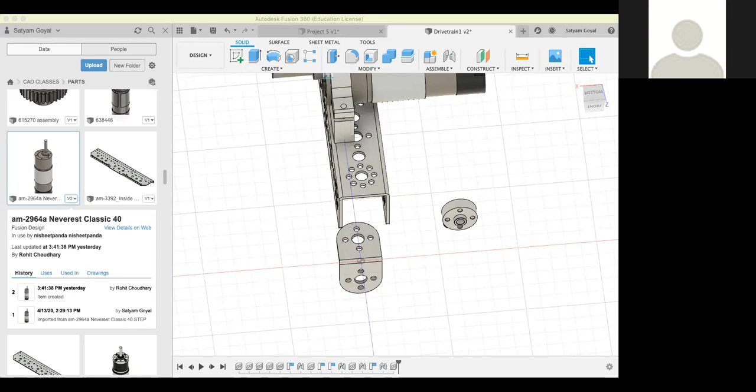Okay, so this is kind of like part two of day four. For people who just came, we were working on projection. We had a bit of trouble with it, but Rohit and I got it. I think we'll work on projection a little bit after we finish this project since you guys already got this started.

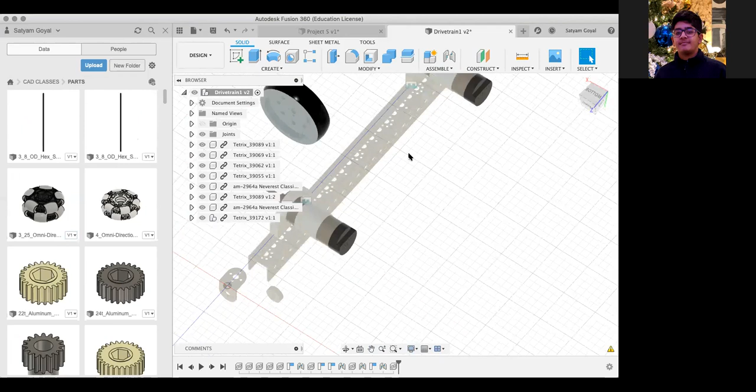So essentially what we've been working on is creating this mini drivetrain. Inside of that, we have this metal bar. I think the name of it is, let me check, Tetrix 39069. You guys can see it here.

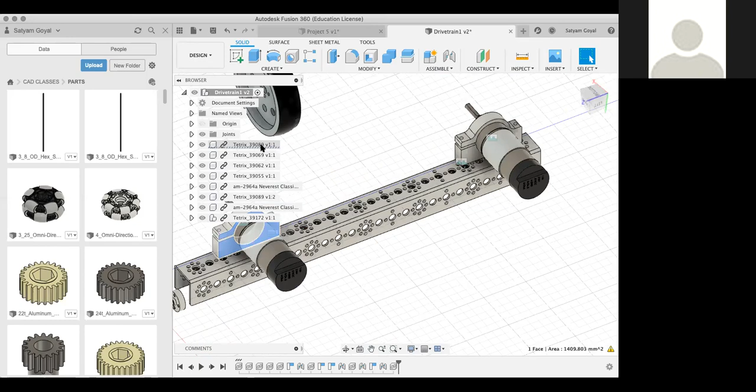We got this beam, and we were able to join two of these motor hubs on top. These motor hubs are 39089. So we joined these two motor hubs on top, and we were also able to join motors onto it, like this, right?

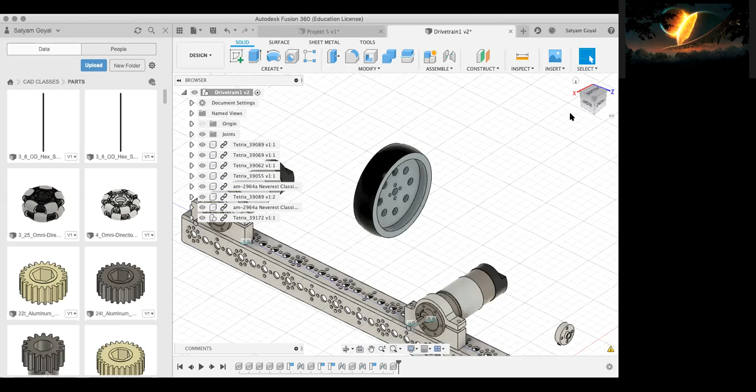How many of you are not at this step yet? Okay, Ritwik, Arush, and Nishi, you guys got it? Wait, are we supposed to do two motors? Because I only did one motor. Yeah, go ahead and just do two.

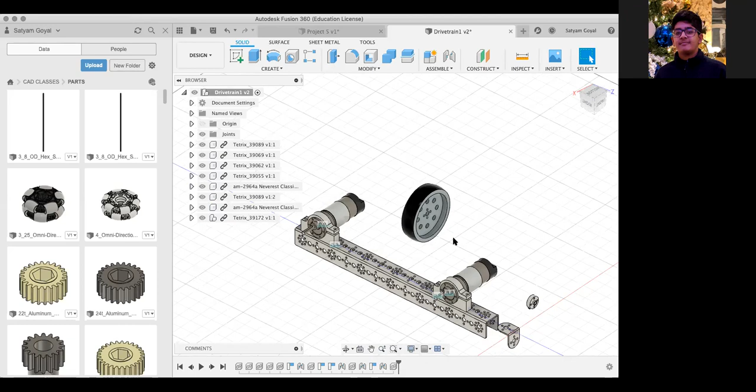On my screen, it's not showing me the orbit and pan options at the bottom. This stuff? Yeah. Okay, one second, let me find it. Let me try and help you. Just continue with what Satyam is saying. I'll get back to you on that. Can you still orbit using this, the square on top? Yeah, I can still orbit using that. Okay.

Are you using a mouse? Yeah. Okay, so if you press the scroll wheel, it'll allow you to pan. That's a cool trick. That works for everybody using a scroll wheel or a mouse.

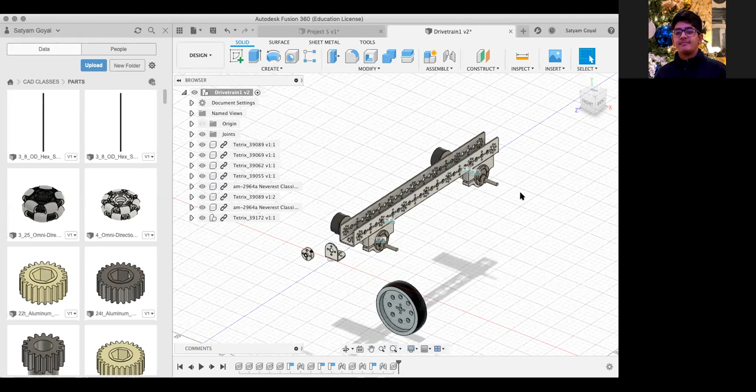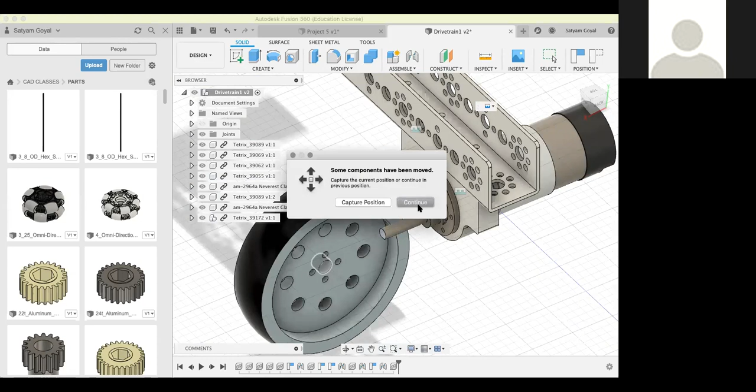So I'm going to wait for you guys to do that. This is where it gets a bit complicated. As you guys can see here, let's see if I were to join these. The obvious move would be, since this is the axle for the wheel, you join the wheel onto this. So if I do that, and then do this, see the issue is that it doesn't exactly fit properly. You see how there's that gap around there?

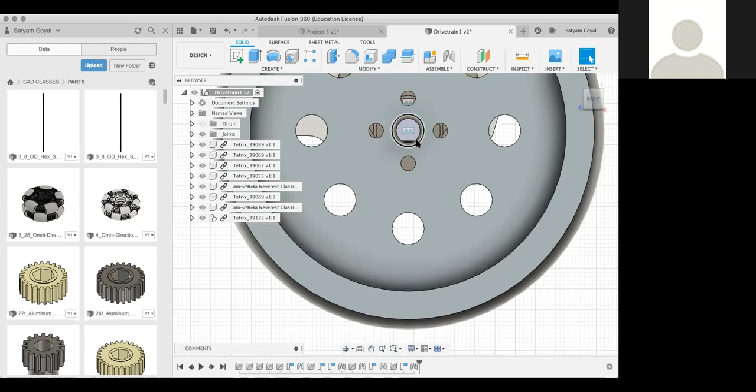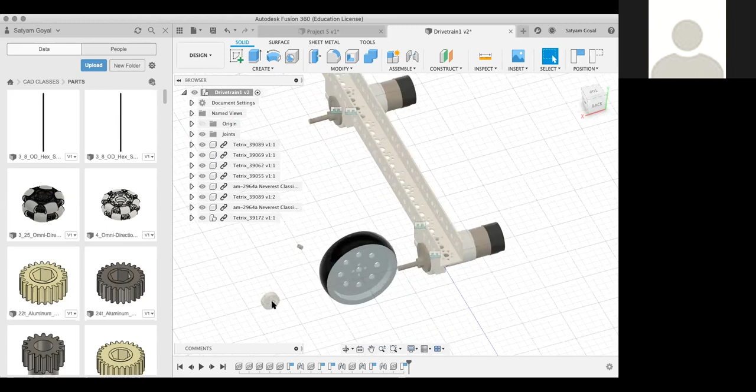Yes. So FTC has essentially created these kind of adapter pieces. I'm going to delete this joint. That is this part right here. It's called Tetrix 39172. Essentially, this small adapter allows you to put screws in through the motor here, and then allows the axle to fit onto this. So this might take a while to memorize once you get into FTC CADing.

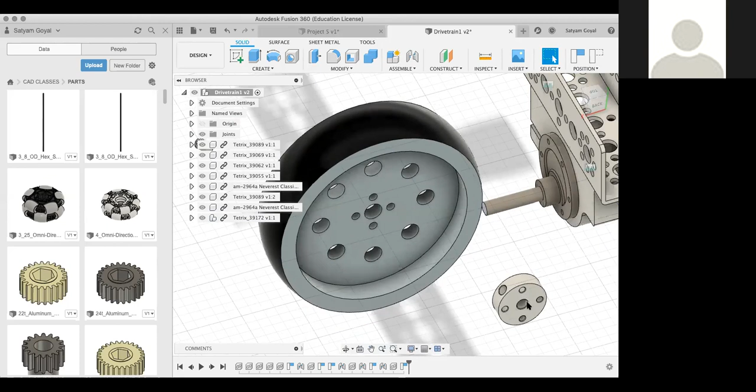Actually, I think I grabbed an axle hub instead of a motor hub.

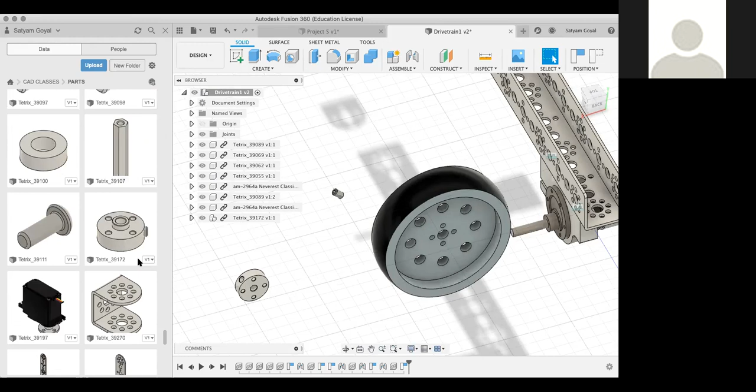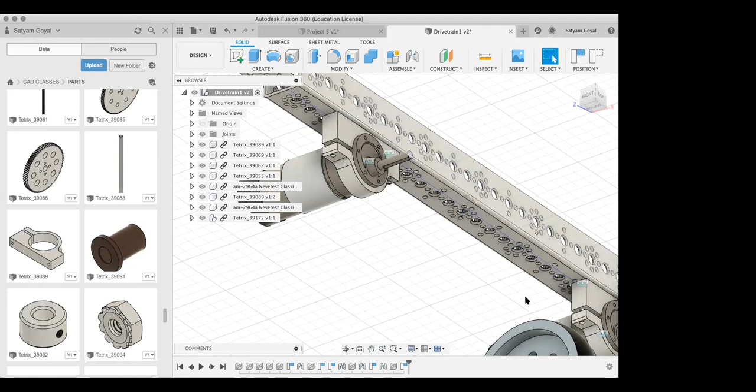I've been trying to fit the second motor into the motor hub, but it keeps fitting the wrong way. Remember, there's always that flip function you can use. So if you can see, when you do a joint, there's a small button at the bottom that says flip. If you press flip, it'll bring it to the right side.

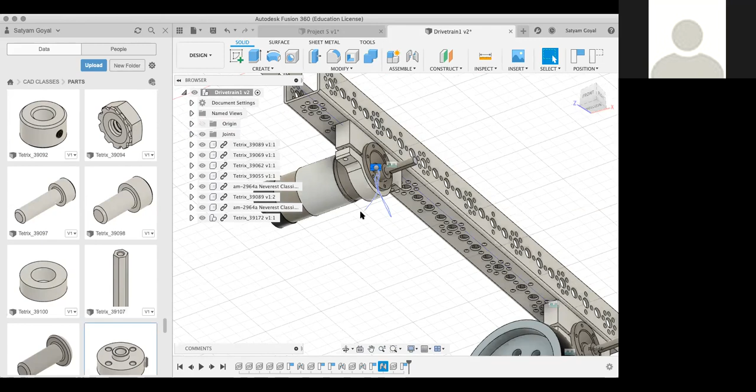Satyam, you just wanna edit a joint and show them. Yeah. Okay, thanks. Did you get it, Satyam? Yeah, okay, I can show. So if I wanted it the other way, I have this button at the bottom called flip, so I just do that. Your screen's kind of lagging.

Oh, that might just be me. So, right here.

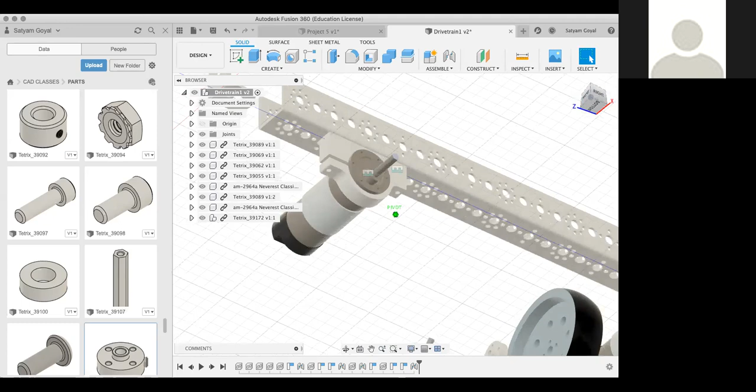Satyam, you want to move on to projections, or finish this? I think let's finish this, I've already got it started. Projections won't take too long, so I think we can finish in the last 10 minutes of class. I'm just gonna show you guys how this works to join.

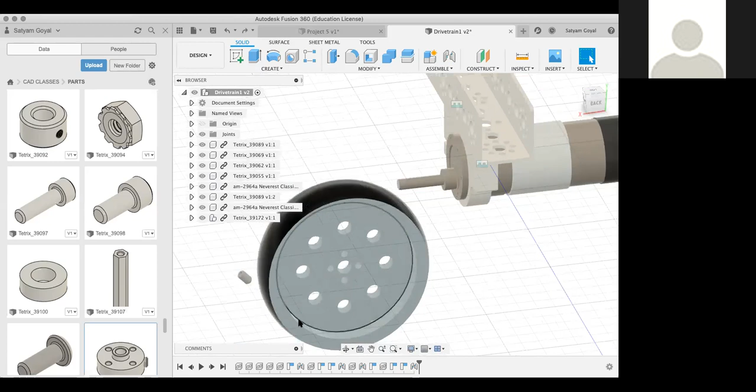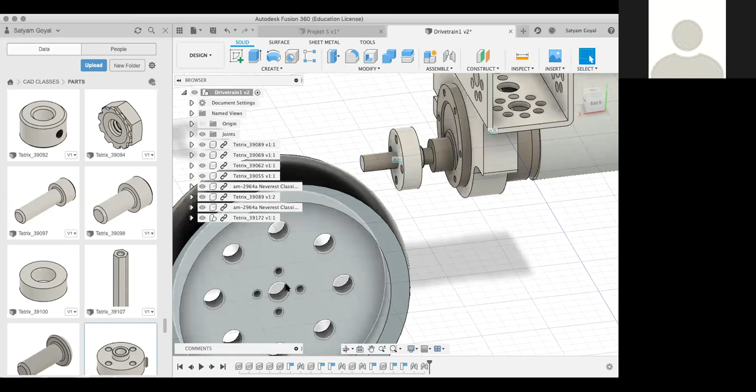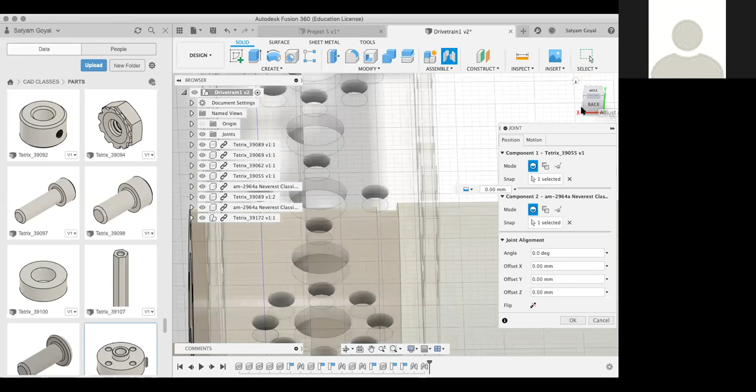So a lot about joints is just like grabbing the right areas and connecting it to the right areas. For example, because I want to connect this to this, I want to make sure this is lined with this. So I can say join this, grab that outer circle and grab this inner part. That's how this all moves together.

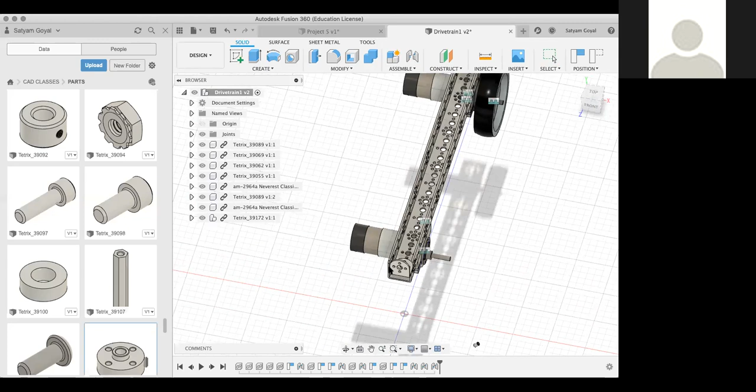So I think we'll work more on this tomorrow as a way to expand on the drivetrain. Pretty much you guys have learned most of the tools required to make a basic drivetrain.

So what else we're planning is, let's say you make two of these, this entire part and this entire part. Then you could take a beam across those two bars and connect it with an L piece or something. So that stuff we can show you guys tomorrow.

But yeah, do you guys have any questions about getting until here? You guys confused about any of the joints? Which wheel did you use?

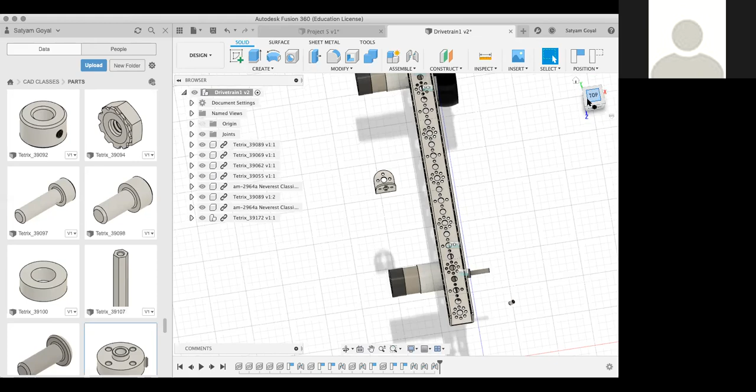Oh yeah, there might be, here. There's like different wheels that I saw. Here it's this one, Tetrix 39055. So this one. Good.

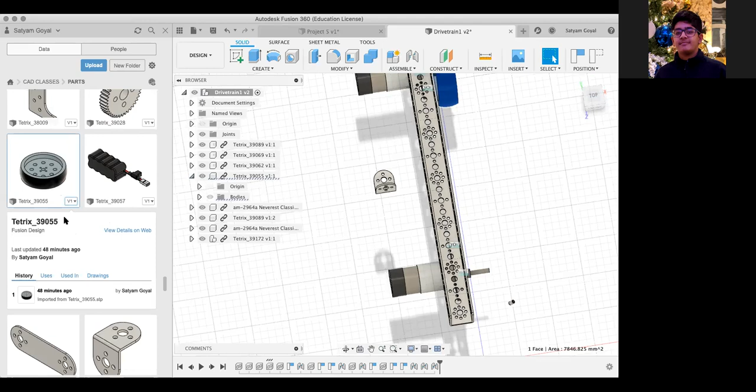Okay, so in the last 10 minutes, let's just go over projection again. Can everybody go back to... something you want to show them? Do you have it open? Okay, so just Command Z a bunch.

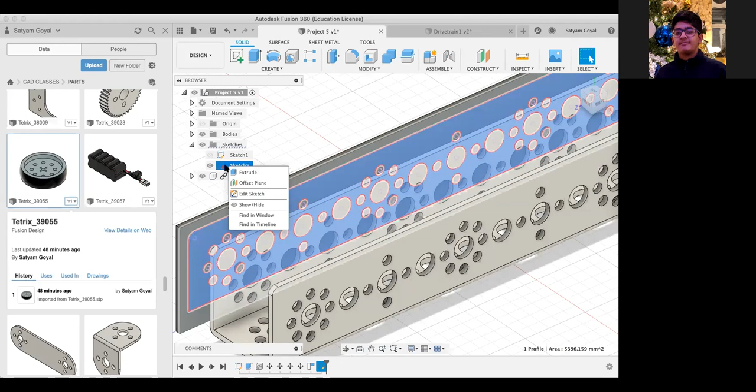Okay, I was having trouble doing it because usually it's in this drop-down menu, and I'm not sure why I can't find it today. But just press P for projection.

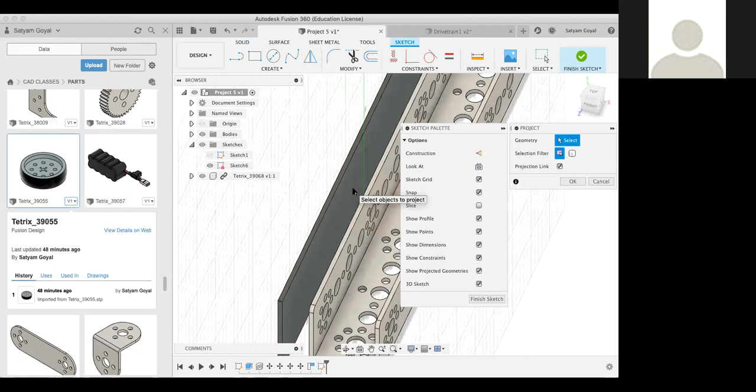Make sure, what's that thing? Instead of doing planes, make sure you're selecting faces. If you just select the plane, it'll be something different. So make sure you guys are selecting the face.

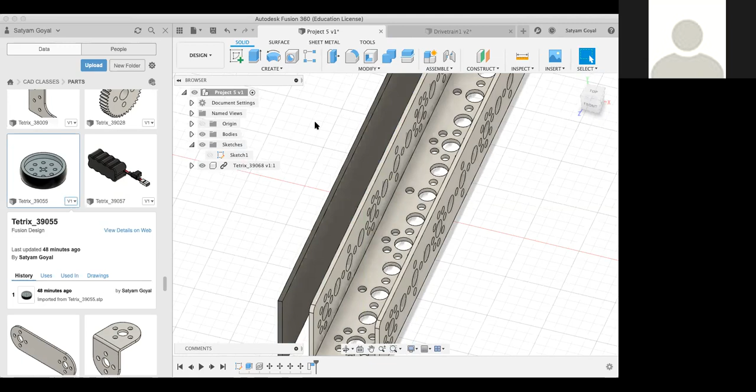So I can do that again. I'll press P for project, and then press this plane, or not plane, sorry, this face, right? So this one. This is the face you want to project onto, okay?

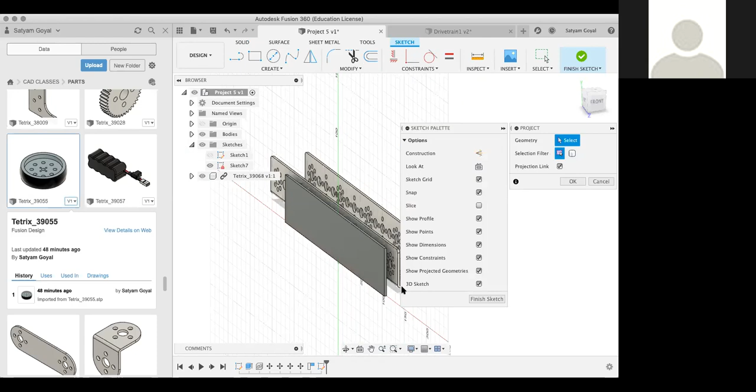Then you select the geometric parts you want to copy. So over here, I'm going to select this face. I want to copy this whole pattern, so I select this face. Now you can see how this whole pattern has been able to go onto this part.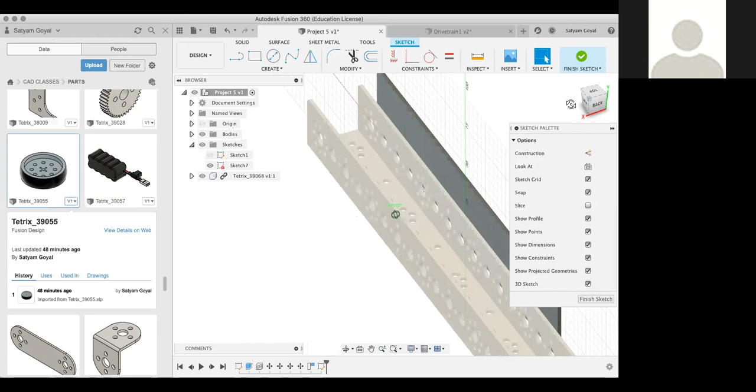So I'm going to do that again just to show you guys. You've already selected the body's face, and then you're going to select the holes you want. I want all the holes from this section. You see how it gets highlighted? So I want all of these holes. What it's going to do is just project it onto that.

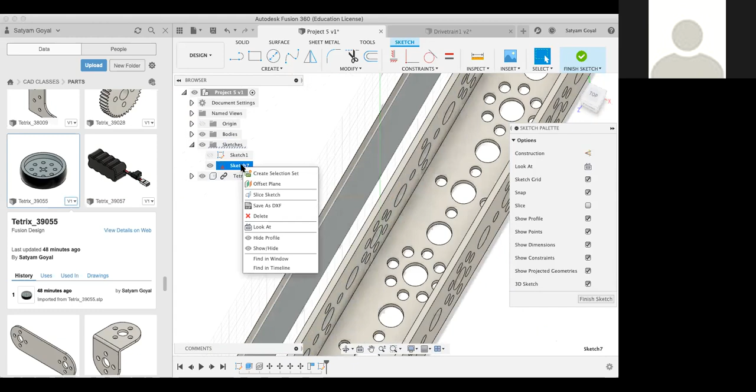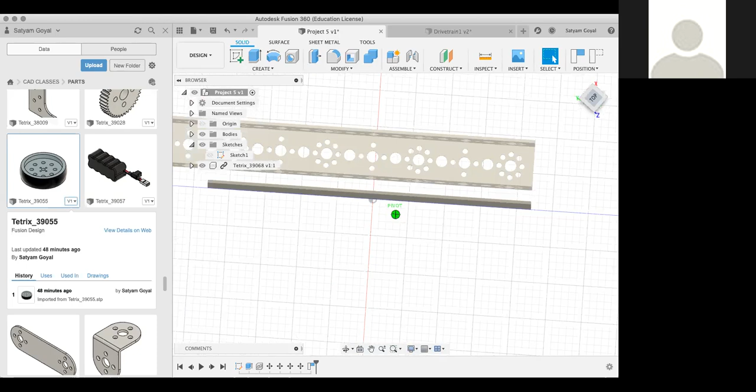So I'll do it one more time, in case this is a bit difficult. Make sure you guys are starting off like this, and make sure everything is lined up properly. So I might want this like this. Make sure everything is lined up properly, right? And then press P.

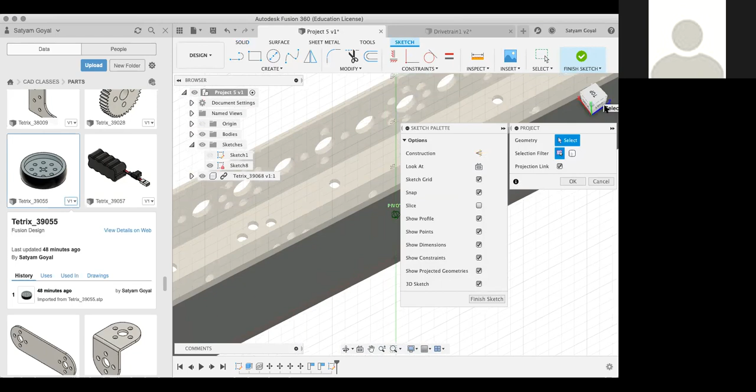Select which face you want the holes to be on. So this one. Then grab where you want the holes from. I want it from this side plate over here, like this.

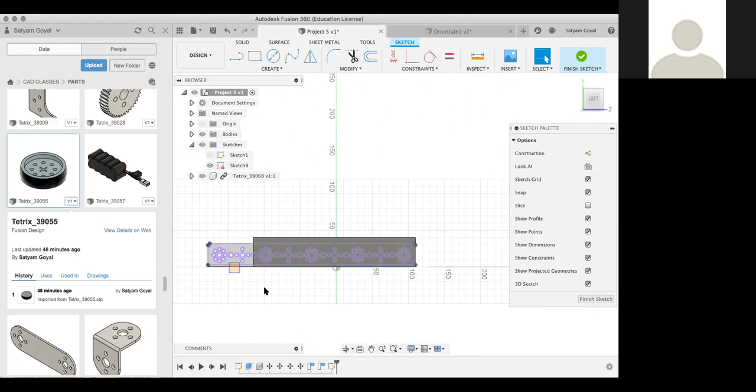Okay, so now you can see here how there's all these holes on your side plate, on the body. So I can move this out of the way. And you press finish sketch. So now I have this, right? So I can move all of this out of the way.

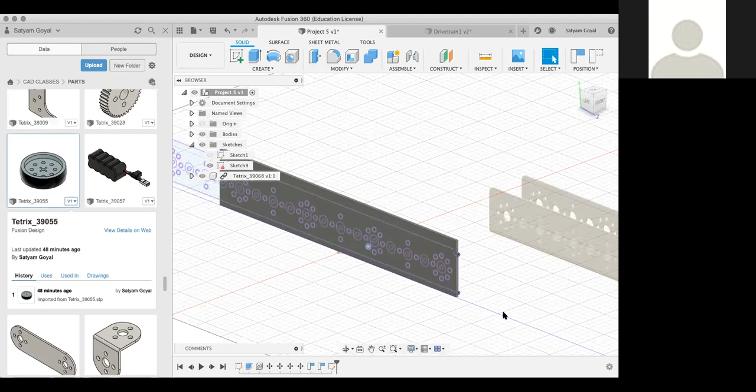And you can see how there's all these holes here. So let me know when you guys are able to get these purple holes on it, or if you want me to do it again.

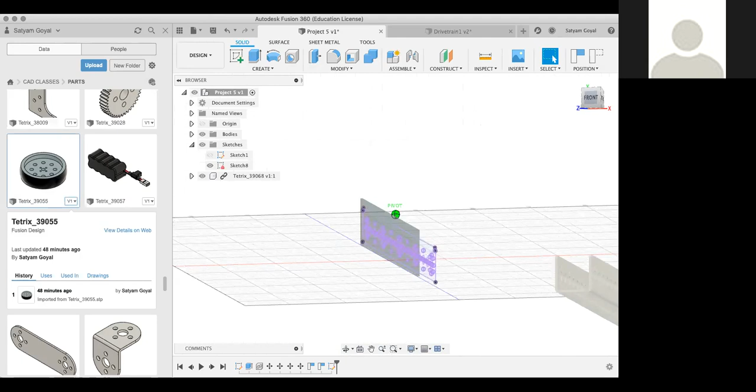And then you guys can also delete this. You don't really need this anymore. I'm not sure if I went over deleting objects, but essentially you highlight it in the menu and then delete it over here.

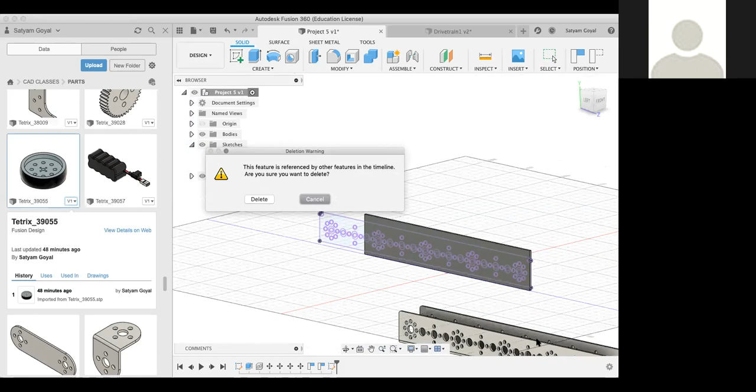So this says this feature is referenced by other features in timeline. It's saying are you sure you want to delete it, because you've made holes through this. But then you just say delete—the holes are still going to stay there, so it's fine.

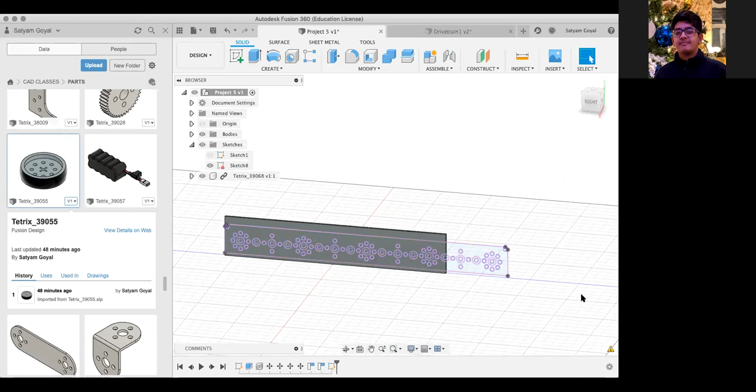Oh Satyam, we just want to finish that up so I can go over materials as well. Okay, let me know guys if you have any trouble. Wait, mine's just having like a trouble on it.

So when I click that face to copy it on, it's not allowing me to click the face that I want to copy it from. Okay, so what might be happening is that when you're projecting... which part are you having trouble on? The first part, or when you're trying to select the holes? When I'm trying to select the holes.

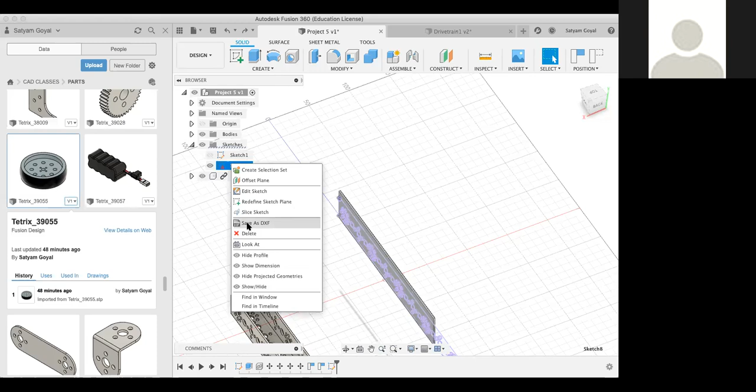Okay, so you should just be able to highlight the... can you share your screen just to see if we can see something else? Okay.

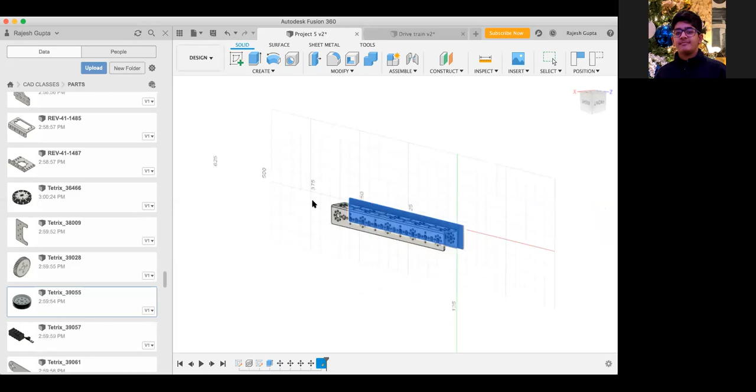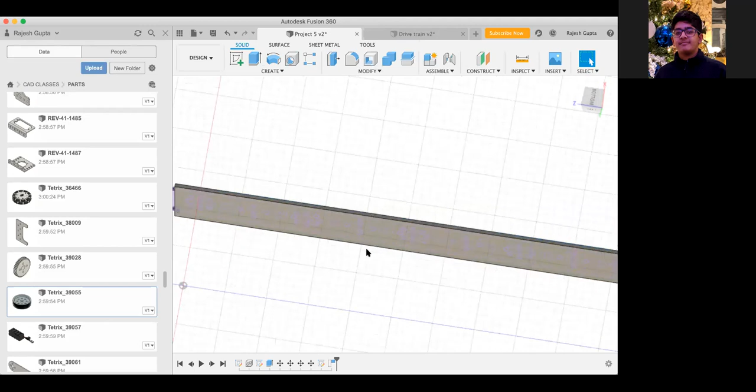Okay, let's see. So hit project, capture position. Now select the first face, and okay, I think I see. Yeah, okay, so try zooming in. Yeah, you got it. This is right. Yeah, you did it. And just hit OK. Now finish sketch. Yeah, you got it. Okay, good job. Oh, I think I might have been selecting the wrong thing.

Okay, so everybody seems to have gotten it. Once you do that, you can just extrude those holes and cut through the object, and you should be given the same hole pattern. Okay, so I'm just gonna go over materials really quickly because this is a really cool way to see your project come to life with the proper colors and textures. So there's two different ways to do this. I'll go over the easier way first.

So what you want to do is go to solid, go to modify, and at the very bottom you can see this appearance button. Rohit, are you sharing your screen? Oh yeah, you are. Do you guys want me to go over that again? I think it's okay.

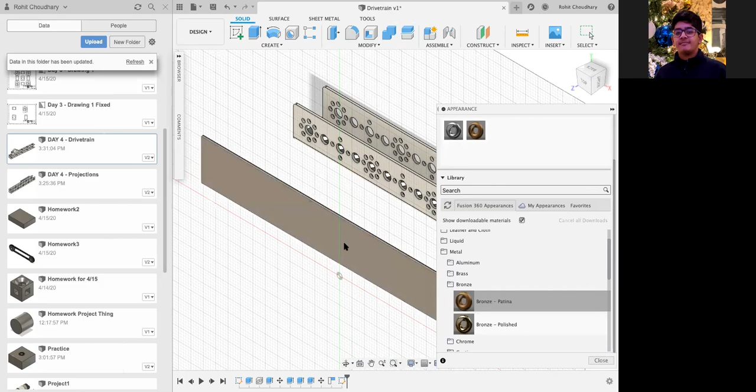So when you go to appearance, or you can just hit A, you're given all of these different types of materials, and you can select whichever one you want and drag it onto a component, and you should see it change color. Some of the parts, like the Tetrix parts, won't do it just because manufacturers have already put a material onto that. But you can test out different things, and it's really cool to see how it'll look with different kinds of materials. So yeah, that's one way. I'm gonna show you guys the other way.

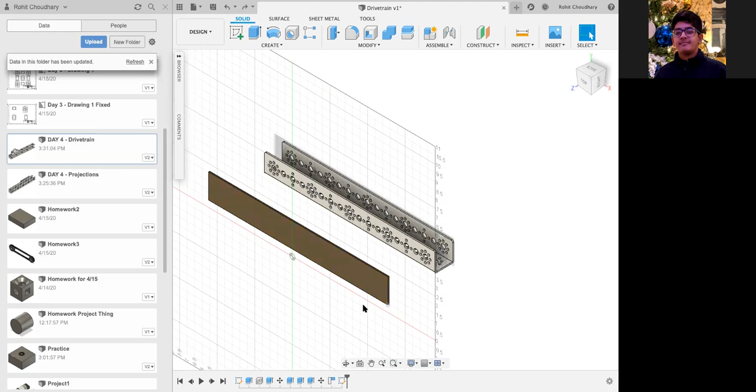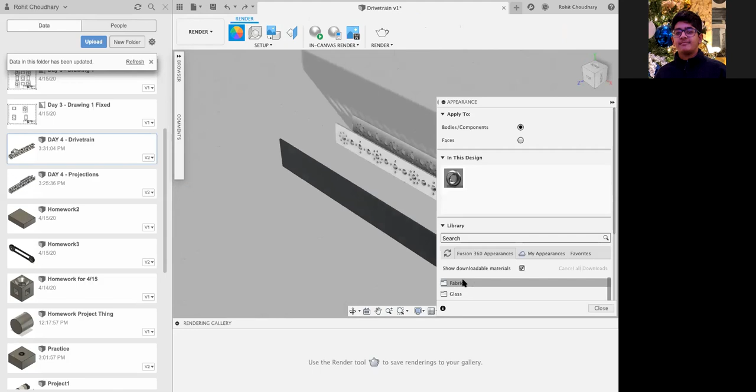So I'm just gonna go back to, let's see. If you go up to design and you hit render, then you're taken to this different kind of plane. At the very top, you'll see the same appearance wheel, and it'll bring you to the same menu, but this is just a different way of looking at it. So you can select different types of stuff. Like I can choose a fabric. You'll see that it has a fabric-like texture now on it. So this is a really cool way to see what different types of materials will look like if you're designing something new, and it's really fun to play around with.

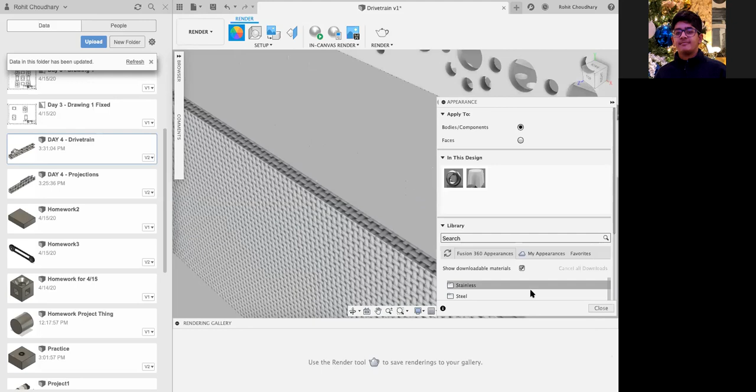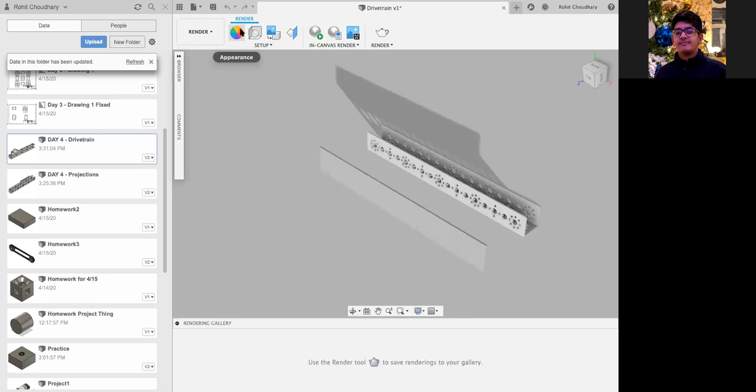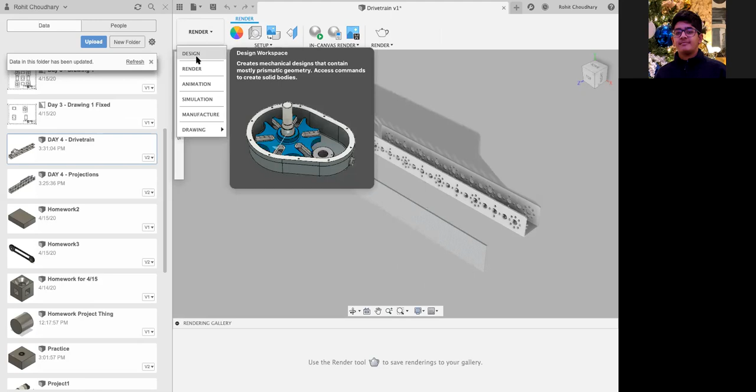I have a question. Yesterday you talked about the simulate thing. Will the type of material affect the simulation? It shouldn't. Sorry, I did not mean to do that. But no, I don't think it will, because this is literally just like a skin on top of it. They're just changing the color of it. So I don't think that'll change anything with the simulation. So if you have a very light car with a light material, it won't change it, right? Yeah, I don't think so. I haven't tested the simulate function that much, so I'm not sure.

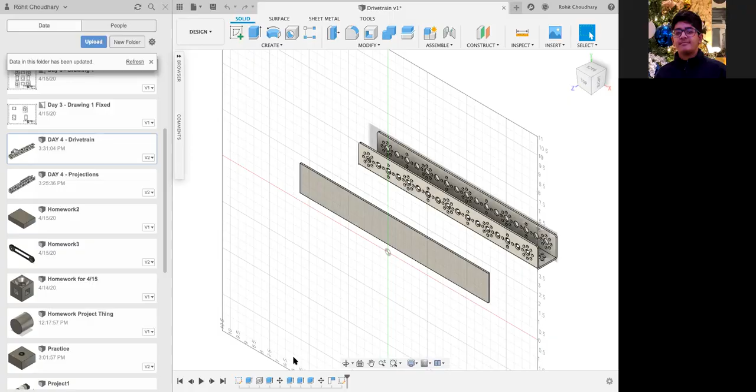But the good thing about Fusion is that it's really common among manufacturers and designers. So if you have a question and Google it, you'll most likely find a video or the forum page on the Autodesk website to answer your questions. Okay. So I think that's about it for today. I went through and added some comments to your work. So if you look through yesterday's projects or other stuff you've started, you should see comments there from me. And you guys can test out more stuff.

So Tim, do you want to add anything? No. So yeah, I think it was a good class today, guys. See if you can work a bit more on the drivetrain. If you can create the other side of it, that will be good. Tomorrow we'll most likely be finishing the drivetrain, just so you have an idea overall of how it's made. So does anybody have any questions about today's class?